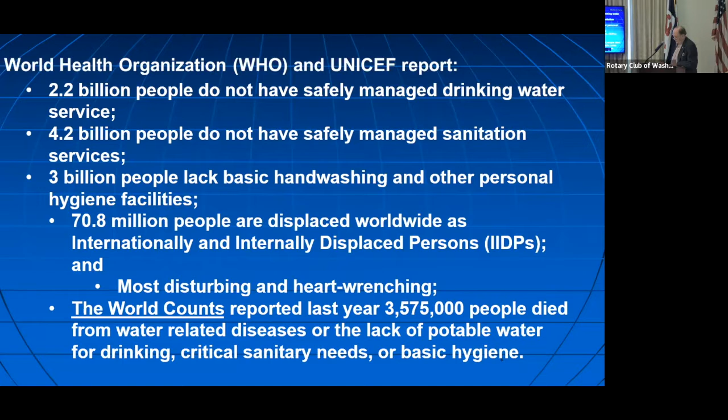The outcome of all this — the number one thing, as the United States CIA, you know what that's all about, but they do a World Fact Book every year — this is water and conflict. They say the number one global conflict is over water. It used to be oil; now they say water is the new oil.

So when you look at these numbers: 4.2 billion without basic sanitation, 3 billion who can't even wash their hands, 2.2 billion without drinking water — this is a disaster in the making.

This leads up to our speaker today, Alan Weiss of Global Water Group. He's been looking at this issue for 40 years. Even though these are his inventions, his innovations, he's really a true humanitarian at heart.

Over half the population needs modular, mobile, deployable, off-grid — meaning using renewable energy — safe and resilient drinking water, and wastewater recycling and repurposing systems, with no sludge, no odor. I'm reading this for you because all of this is coming up, but it goes down to the potable effluent. The systems he has will take any kind of water that exists — brown water, black water, salt water, whatever — and turn it into pure drinking water.

Along the way, besides our water purification systems that we have made primarily for the military, Global Water has been providing systems for the US military for 90% of our business. Special forces, every branch of special forces - they don't leave the country to go fight a war without our backpacks, and we build all the way up to base camp systems. That's what we've done.

About 20 years ago, they came to me and said, could we clean up the effluent from a wastewater system? And I said, sure, we can do that. They introduced me to another company that reduces the amount of sludge in a wastewater system. Doesn't totally eliminate it, but they wanted us two companies to work together to improve on their base camps that they had. We made a presentation to the military base, one of them in South Carolina, and I got all done listening to the president of the other company that makes this wastewater system, mostly for offshore drilling rigs.

And before he was done, I realized how I could improve what they're doing and bring it to another level, and eliminate all of the sludge in a wastewater system using air and enzymes.

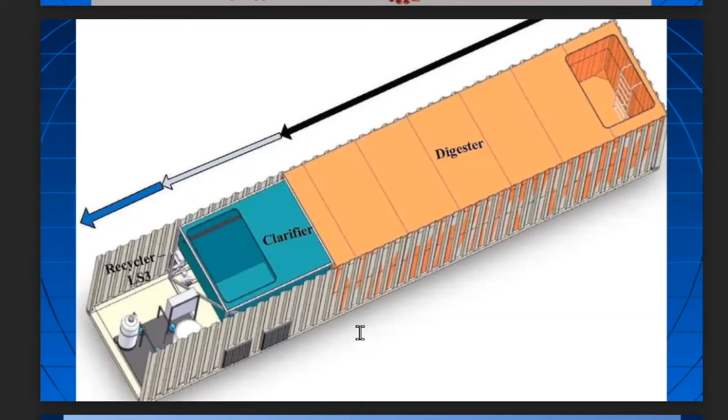And now we're bringing that out into the world of residential, public utilities, developments, so that everyone can have this quality of a wastewater process.

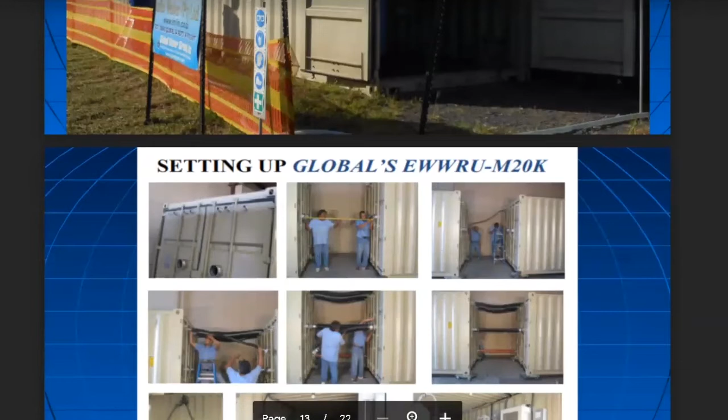This is an example of a 40-foot wastewater recycling system that we installed in South Africa. The US military asked us to put that into, instead of a 40-foot container, two 20-foot containers. This slide shows assembling those two 20-foots together.

Here's a smaller version that we made of our wastewater recycling system for the US EOD and the Seabees and the Navy SEALs, and they had this all over. Then we designed systems for base camps, so now we have it designed for communities. Whether you're going to have 500 people in a community or 5 million people in a community, it all works on this same graphic - purify water coming in, use that water in your kitchens, bathrooms, sinks, and showers.

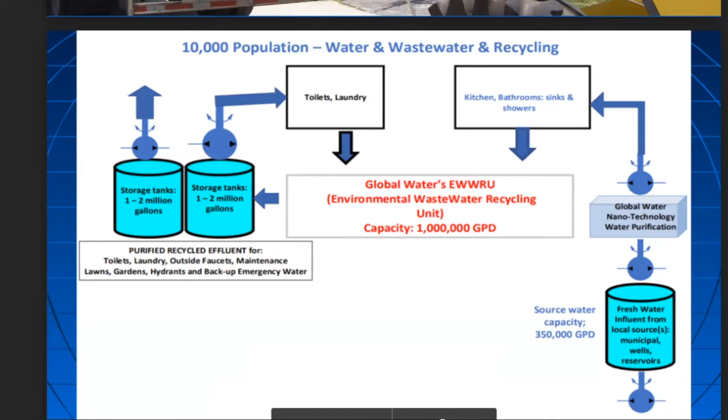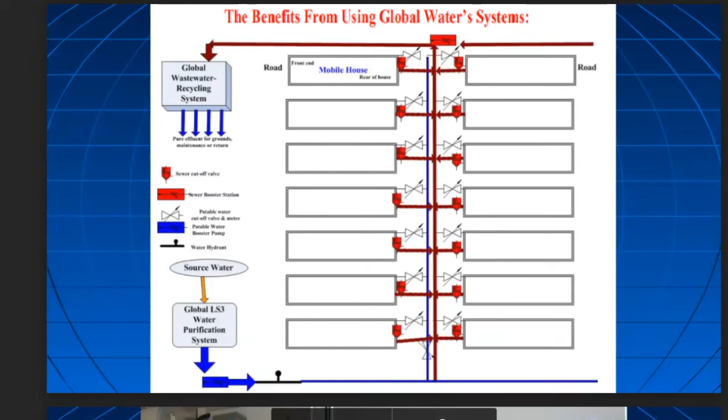That water flows down into this wastewater recycling system where we store it and use it in toilets, laundry, maintenance, everything we could do. And it's a constant flow of saving water. We've made designs for FEMA for workmen's camps after disasters, and this is how we would hook them all together to do that whole flow of water.

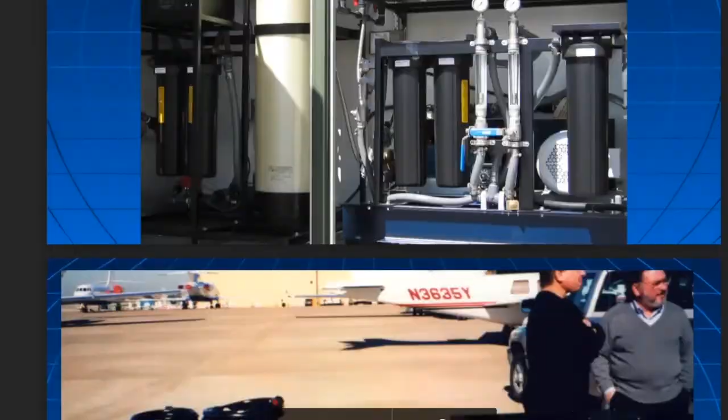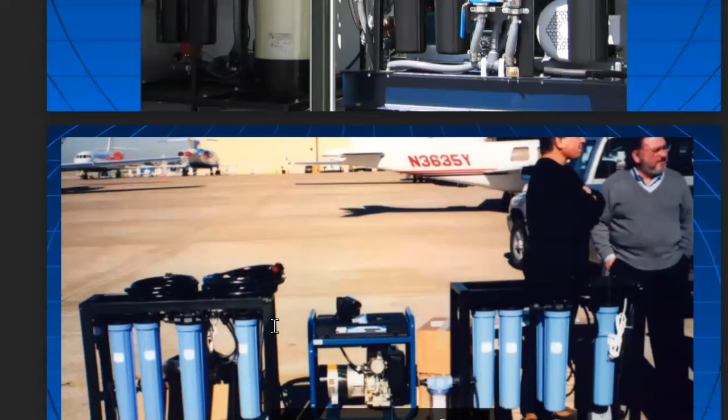With humanity, someone came to us and said there was flooding in Honduras about 18 years ago. They said, they're friends of mine there, and I need to get them some systems of yours that would purify the water for them. I'm going to fly it down in my little plane, here's the size of my door. And we designed these two systems that day. He picked them up 2 days later and flew them to Honduras. 18 years later, one is still operating a hospital, and one is still operating a police department.

This also is a mobile desalinization system. This gives you an idea how the company even started back in 1992.

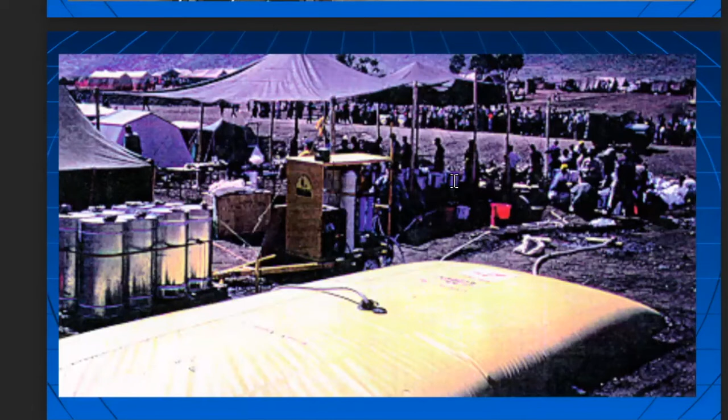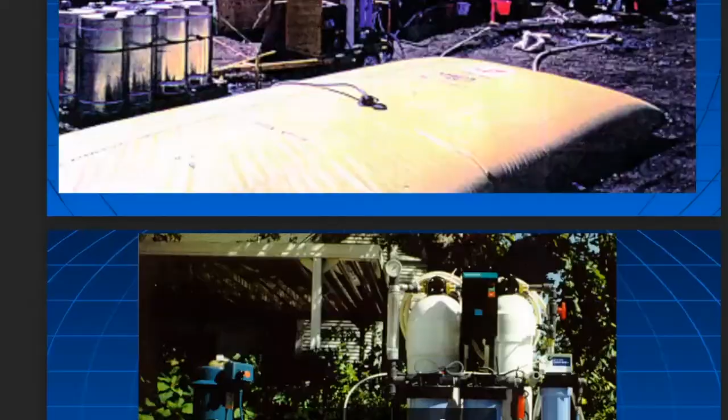This was putting a water purification system at a refugee center in Turkey after an earthquake. And this big bladder was filling with water that we purified so the people would have water in those camps. And this was another purifier in that same camp that we had.

And that pretty well covers what we're now doing, which is looking to do this all over the world. Yesterday, I got a call from a group out of Nepal and India that want to send water systems and our wastewater systems to Ukraine, which is going to take some time to rebuild. And we're going to start building those.

I have a simple question that I don't know the answer to, so I hope you can give the answer. When we boil water at a high level, the H2O goes up in the air and is very qualified, very clean, and can be brought back to nature with a cooling system. Why isn't that simple thing done? There is a reason, right?

I'm not sure if you could repeat. She's asking about boiling water and allowing it to evaporate. So it's kind of like transpiration, but on a stove.

Yeah, I've been all over the world. There are many communities that have to do it all the time. Even outside of Dallas, in a suburb, because there's an oil leak in a lake where their reservoir is, they say don't drink the water, boil it for the next 3 days. Well, if we had a filter in there, our filter system, we would be able to give you purified water no matter what happens with a leak or anything else.